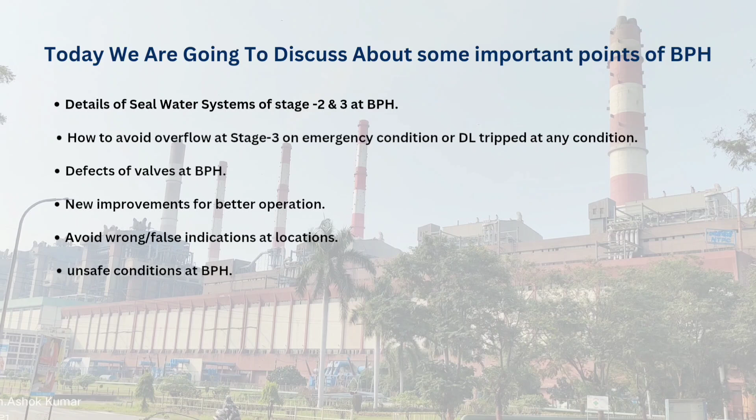Today we are going to discuss some important points of BPH. Details of seal water systems of stage 2 and 3. How to avoid overflow at stage 3 in an emergency condition or when DL tripped in any condition. Defects of valves at BPH. New improvements for better operation. Avoiding wrong false indications at locations. Unsafe conditions at BPH.

Details of seal water systems at stage 2. The clarified water to BPH stage 2 comes from the stage 2 DM plant, and that line is called the Dhanras line. At stage 2 we have 3 seal water pumps, A, B and C. Of these 3 seal water pumps, pumps A and B take suction from the clarified tank and pump C takes suction directly from the Dhanras line.

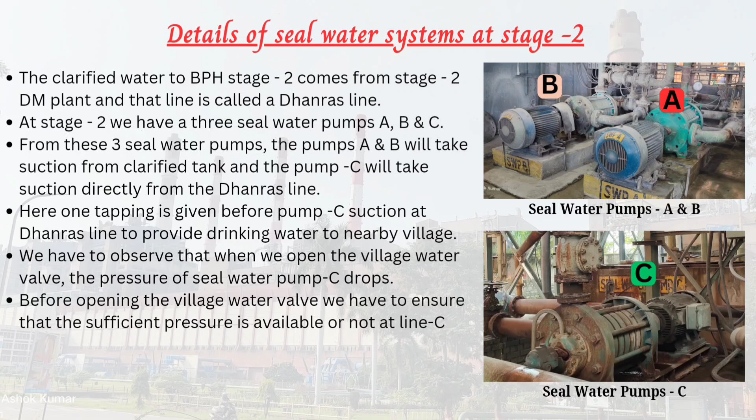Here one tapping is given before the pump C suction at the Dhanras line to provide drinking water to a nearby village. We have to observe that when we open the village water valve, the pressure of seal water pump C drops. Before opening the village water valve, we have to ensure whether sufficient pressure is available at line C.

Defects of seal water system at stage 2. At stage 2 all series regularly run with the combination of seal water pumps A and C or B and C, and the rest of the pumps are in standby. Any two series will always get charged from one seal water pump. We have two seal water header lines, one for seal water pumps A and B and one for seal water pump C. When seal water pump A trips for any reason, seal water pump B immediately starts in auto mode and there is no interruption for the series. Likewise, if seal water pump B trips, seal water pump A will immediately start in auto mode.

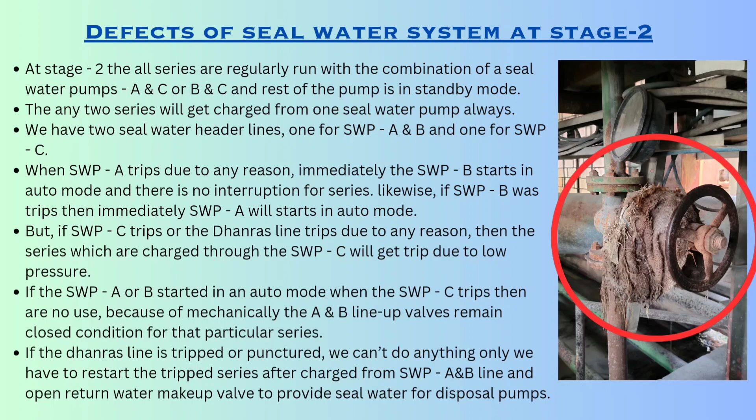But if seal water pump C trips or the Dhanras line trips for any reason, the series which are charged through seal water pump C will get tripped due to low pressure. If seal water pump A or B starts in auto mode when seal water pump C trips, it is of no use, because mechanically the A and B lineup valves remain closed for that particular series. If the Dhanras line is tripped or punctured, we can't do anything; we only have to restart the tripped series after charging from the seal water pumps A and B line and open the return water makeup valve to provide seal water for disposal pumps.

How to overcome the problem when seal water pump C trips? An interconnection line is available between seal water pumps B and C through the seal water pump B discharge bypass line, but it is not in use. The seal water pump B discharge bypass valve is manually operated. It takes us more time to open the valve, and thus the series which are charged through seal water pump C will get tripped. So, we have to modify that valve to open automatically when seal water pump C trips or pressure drops at line C.

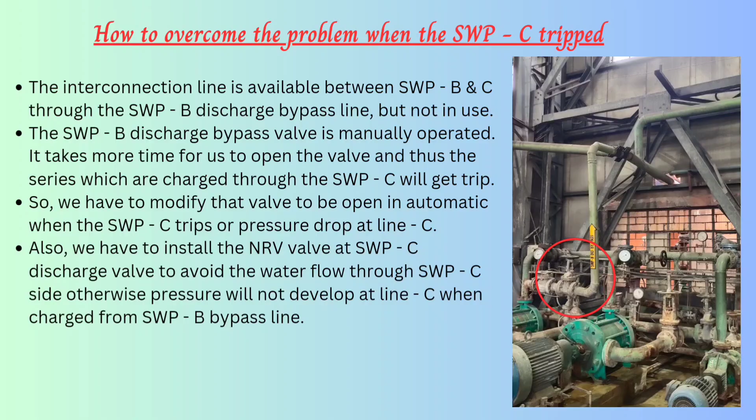Also, we have to install an NRV at the seal water pump C discharge valve to avoid water flow through the seal water pump C side, otherwise pressure will not develop at line C when charged from the seal water pump B bypass line.

Details of seal water systems at stage 3. At stage 3 we have 4 seal water pumps: LP seal water pumps A and B and HP seal water pumps A and B. The clarified water comes from stage 3 PLC SWT pumps A and B to the BPH stage 3 clarified tank. LP seal water pumps A and B supply gland seal water to the first and second stage pumps and get permissive when header pressure is more than 10 ksc. HP seal water pumps A and B supply gland seal water to the third and fourth stage pumps and get permissive when header pressure is more than 18 ksc.

Trip conditions: first stage pump gland seal water pressure is less than 4.2 ksc. Second stage pump gland seal water pressure is less than 9.5 ksc. Third stage pump gland seal water pressure is less than 13.2 ksc. Fourth stage pump gland seal water pressure is less than 18 ksc.

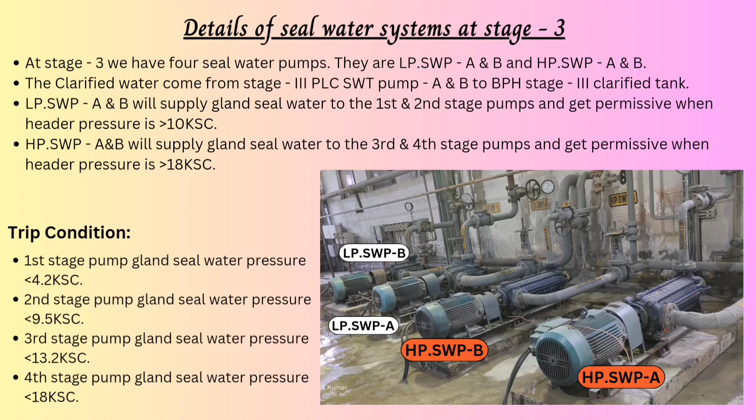Defects of seal water systems at stage 3. There are 3 series in stage 3, A, B and C. These 3 series pumps are supplied with gland seal water from LP seal water pumps A and B and HP seal water pumps A and B.

These seal water pumps are suitable for driving 2 series at a time. If you want to run the third series, the seal water pumps do not produce adequate pressure and will not get permissive to start the series. If we want to run the third series in emergency condition, then we have to apply force mode of pressure.

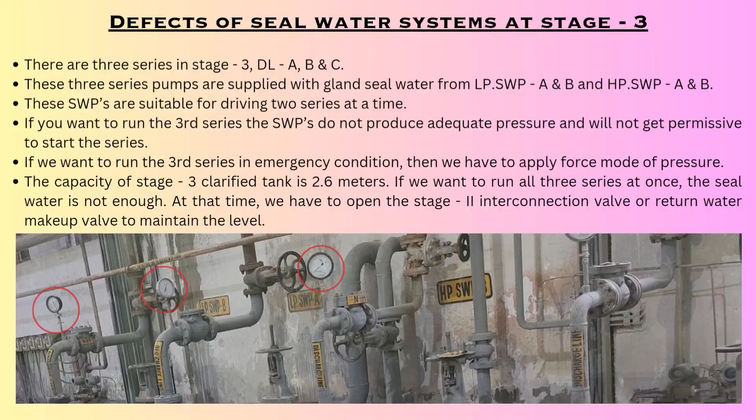The capacity of stage 3 clarified tank is 2.6 meters. If we want to run all 3 series at once, the seal water is not enough. At that time, we have to open the stage 2 interconnection valve or return water makeup valve to maintain the level. How to avoid overflow at stage 3?

In stage 3 we have overflow pumps, A and B, to empty the overflow pit. The overflow pump A discharges into the main pit of stage 3. The overflow pump B discharges into both stage 3 main pit and stage 2 pit B. If overflow pump B is not available, then it's very difficult to maintain the overflow pit.

A small overflow pit is located next to the stage 3 overflow pit at ground level to allow this water through the trench to flow into the pit when it overflows.

What we have to improve? We have to modify overflow pump A. This should also be made to discharge in stage 2. We have to install the pump near the small overflow pit and discharge it into the stage 2 main pit. This is useful when overflow pumps are not available.

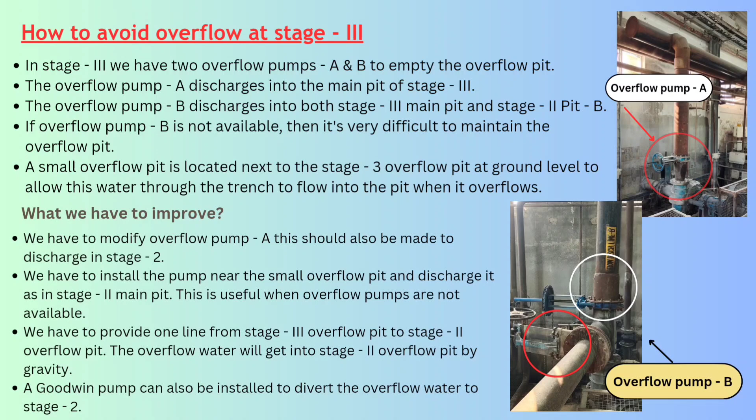We have to provide one line from stage 3 overflow pit to stage 2 overflow pit. The overflow water will get into stage 2 overflow pit by gravity. A Goodwin pump can also be installed to divert the overflow water to stage 2.

Defects of valves at BPH. Stage 3 clarified makeup valve has a heavy leakage and is corroded and needs to be replaced. Stage 2 jetting water line: if we charge from return water pumps C and D, the valves are not holding. Stage 2 seal water lineup valves all are having a heavy gland leakage and need to be replaced. Stage 3 seal water lineup valves all are having a gland leakage and need to be replaced.

Stage 2 and 3 all suction and flushing valves are passing, which should be repaired. Ash water return pumps C, D, E and F suction and discharge valves are not operating remotely and need to be fixed. Stage 2 all DL 1, 2, 3, 4 and 5 discharge valves are not operating remotely and need to be fixed.

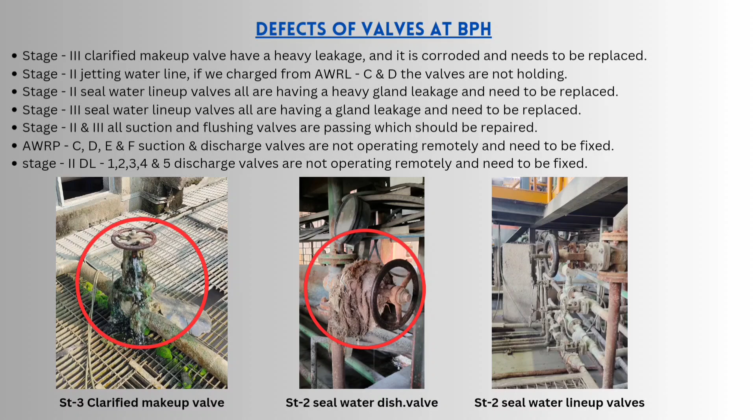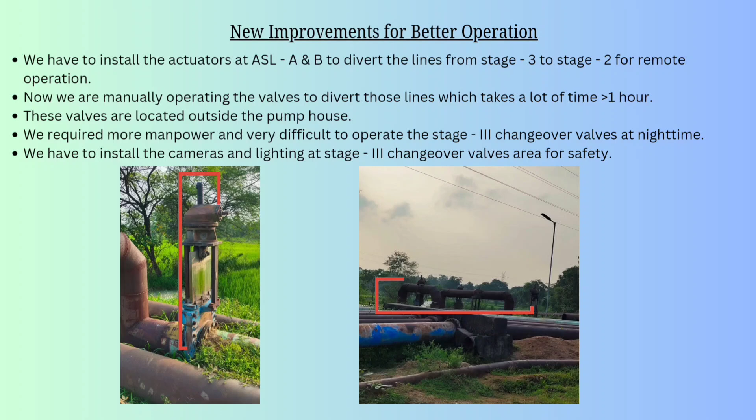We have to install cameras and lighting at stage 3 changeover valves area for safety. We need a DG set or DC supply for stage 2 and 3 suction valves to operate at the time of blackout and also to avoid the overflow.

It takes 45 minutes to operate a single suction valve, and it is difficult to operate the valves manually when there is a blackout. Now before starting stage 2 decant pump B, the flushing valve should be opened and the flushing line should be charged from Dhanras line for taking suction, it's to be changed to return water line.

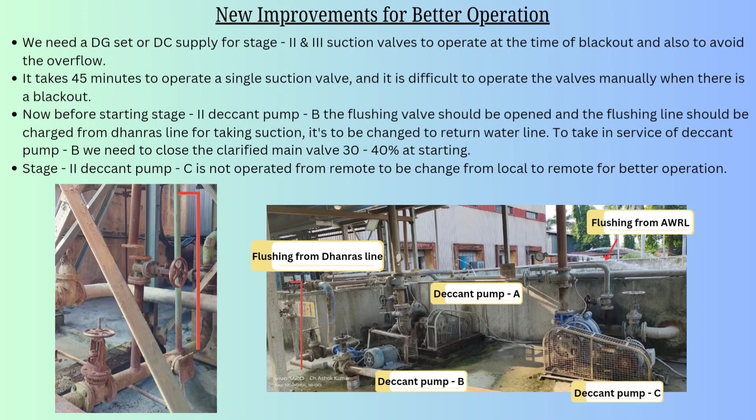To take into service the Decant Pump B, we need to close the clarified main valve 30 to 40% at starting. Stage 2 Decant Pump C is not operated from remote, to be changed from local to remote for better operation.

Avoid wrong false indications at locations. We should identify correct equipment and ensure before going to isolate or normalize any valves or any electrical mechanical equipment. Do not write wrong writings in every location and near the equipment and machines. Mistakes can lead to unintended consequences when we have to do one thing instead of the other.

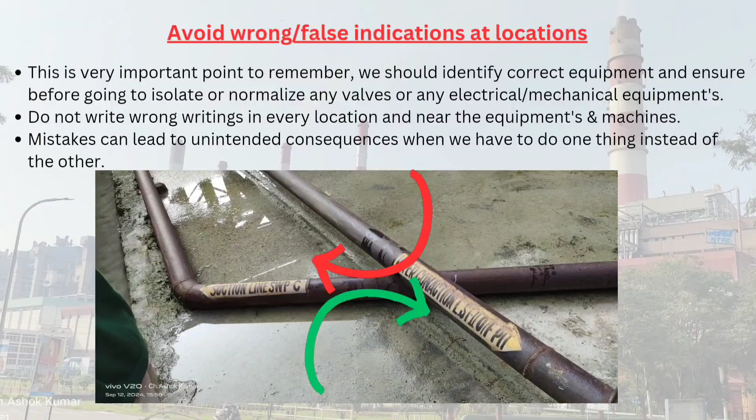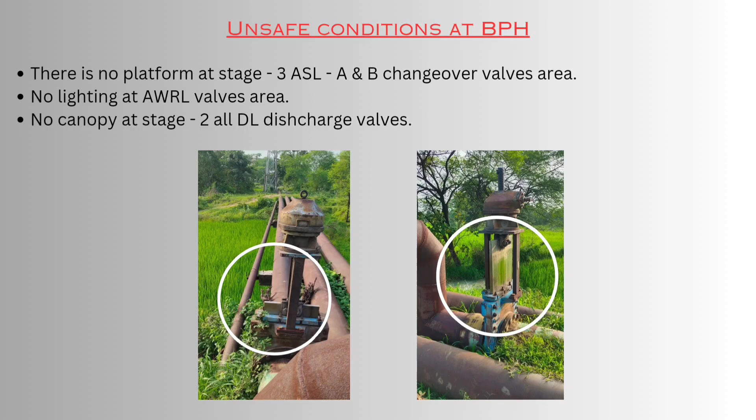Unsafe conditions at booster pump house. There is no platform at stage 3 ASL A and B lines changeover valves area. No lighting at return water line valves area, it's difficult at night time. No canopies at stage 2 all DL discharge valves.